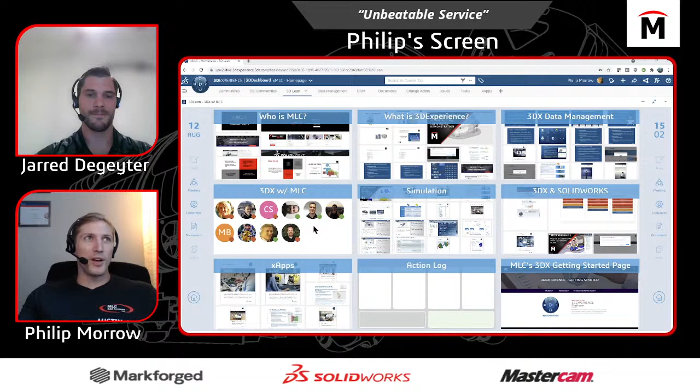But the cool thing about this is multiple people can log in. Like my whole team can log into this, and you could put sticky notes on it, use it like a whiteboard. It's pretty cool if you've got a big touchscreen monitor, but it allows you to have that whiteboard meeting even though you're spread out across the country. But I'm not here to talk about that.

I'm going to talk about data management a little bit, or really just data storage. Probably you think that's a proper name for that, Jared? Yeah, I would say so. I mean, we're not really going to get too deep into the weeds of the data management side of things, but primarily I think trying to highlight the fact that we can work collaboratively with a minimal amount of setup. That's a good point to put out, because everything I'm doing here, I haven't done any setup at all. Everything I want to show is just what you get out of the box. There's a lot of things you can tweak, but you're right, minimal setup here.

And I'm calling this data storage and not data management, because this first tool I want to show you is more like using Dropbox or OneDrive. It's just a place to put files, but you don't have to think about any of this revision control, PLM, lifecycle stuff. And this is called 3D Drive.

Another cool thing about 3D Drive, besides it being as easy to use as OneDrive or Dropbox or anything like that, is that anybody who logs into 3D Experience will have access to a 3D Drive. So you're going to have other people on the team who aren't SOLIDWORKS users and aren't connected to SOLIDWORKS, but you want to invite them to design review meetings.

You want to collaborate with them in some way. You want people to be able to pull a bill of material. Whatever reason they're working with you, they also get a 3D Drive.

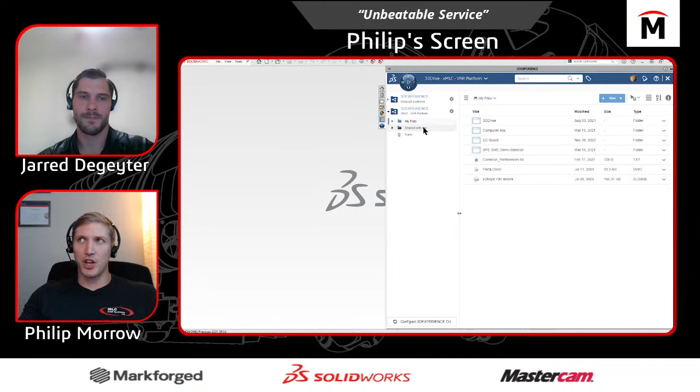So I can access all of those same apps I was just accessing through my web browser inside of SOLIDWORKS. I can hit 3D Drive from here, and then bang, I've got kind of my 2 drives here. I've got my MLC one and the other one. I can see all my files, the ones shared with me. Now I've actually got more control inside of SOLIDWORKS and inside of the web interface than I do in Windows Explorer, because here I've got the trash, I've got shared with me, I've got the history and file information.

So you do get kind of more robust functions if you're doing it inside of SOLIDWORKS or inside of the platform. But I want to move some files that I've got in there, just Windows Explorer style. So if I go down to my desktop, I've got a folder right over here called Gripe Grinder, for grinding all my gripes. And inside of it, I've got a simple assembly for doing my gripe grinding. It's got this many files in it, not a huge number of files. And what I'm going to do is just a little copy.

I just Control-C that to copy and paste right inside of my 3D Drive folder in Windows Explorer, which is not unlike what you'd see happening for Dropbox or OneDrive or anything like that. And you get a symbol on here as well, the refresh symbol, just like you would in OneDrive, for this thing getting picked up and synced up to the cloud. So just give it a second to go up there, and then I'll have it on the other side. I got a green check on it there. That's all it took. Very complicated, right?

Jared, I think even you could master this, getting a file inside of here. That's pivotal technology, I tell you. Pivotal. Actually, I got the folder in here.

I got all the files inside of here as well, all the SOLIDWORKS files. So they're all over on that side. And then I could go check them out on some different spots. Tell you what, I'm going to jump back to the web interface. I work here a bunch, and you can actually see the folder popped up here immediately.

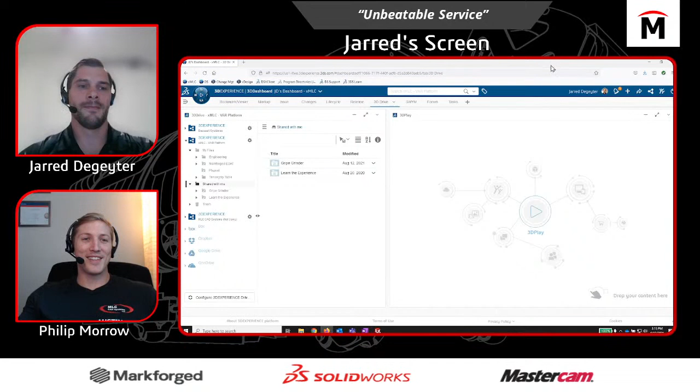I saw a cool question in the chat, which is live: what happens when multiple people try to open the same shared file? Well, right now, that was a good question, Michael Ennis. Right now, same problems as always, because we're kind of on that level 0 file storage. One person's going to have write access, one's going to have read. It wouldn't be good, but we will get to the solution to that problem. So that's a good question, stay tuned, keep that pinned.

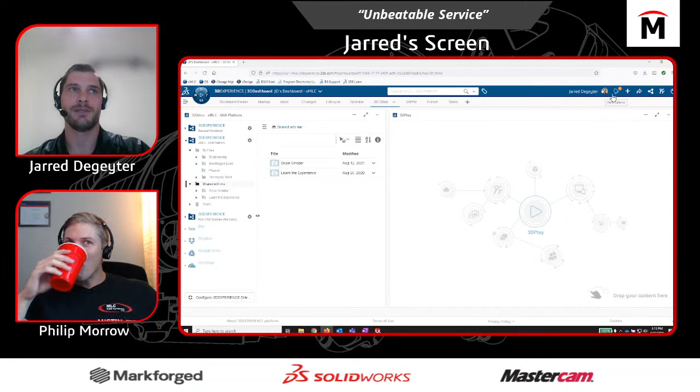All right, guys, so if my feed is coming through, this is going to look really similar. I'm just sitting here in a web browser. And I've got this notification that just came through because Philip just pushed this file set over to me. He said, okay, Philip shared a gripe grinder with me. He said, dude, check out this assembly for grinding gripes. I've got plenty of gripes, I'm sure everybody can relate, so I'm definitely going to go ahead and take a look at that.

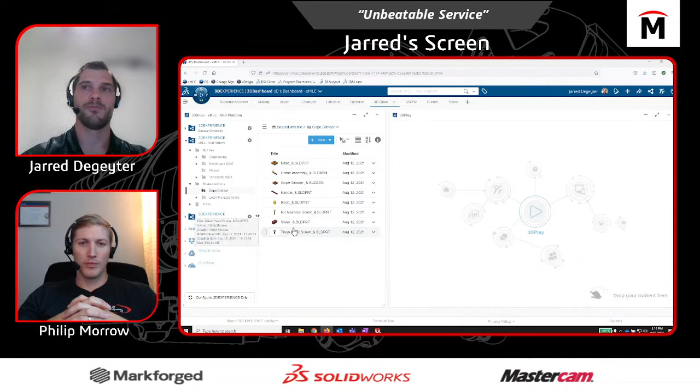I'm just going to get into my 3D Drive. This is the web interface. One of the really cool things about the platform is this built-in preview device we have. 3D Play is basically a previewer. I'm going to find our gripe grinder assembly and drag and drop it into this 3D Play application.

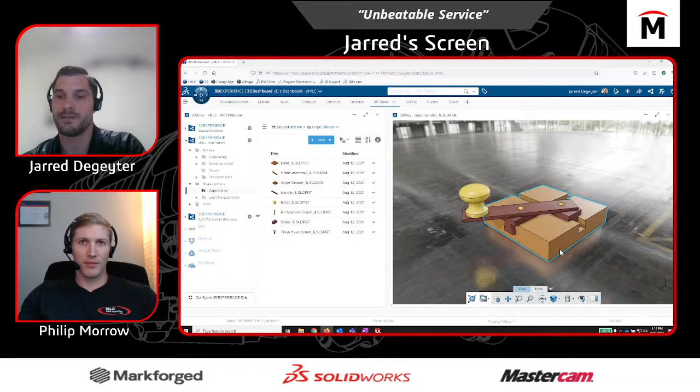So you've got kind of the same layout as me, but you just decided to drag 3D Play and sit it next to your 3D Drive. Yep, super customizable. Every user has the ability to customize their interface to suit them best. On the flip side, as an administrator, you can also create a controlled dashboard that you can push out to your users. Really cool, flexible stuff here.

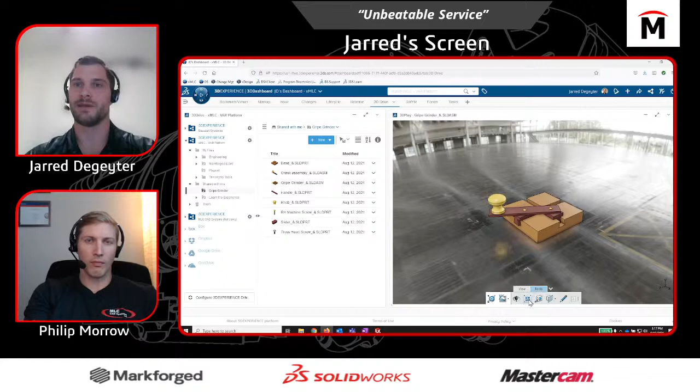This allows me to basically zoom in, zoom out, check out this assembly we're working with right here. You can also do stuff like explode it, so you can see how all the parts fit together. And this is accessible from any device that's connected to the internet.

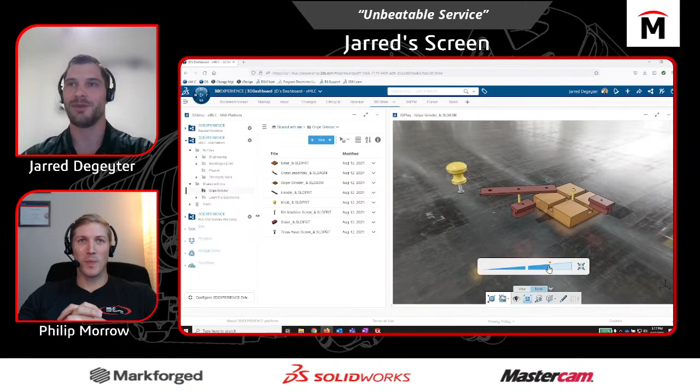That's not an exploded view that's made in SolidWorks, is it? Right, this is doing the exploded view by itself, 100%, so you don't have to waste time doing it. It's kind of funky, I guess, the way it's blowing it out, but it gets the point across, and you didn't have to do any work for it.

That's pretty cool, I think you take what you can get. I don't want to hear your gripes, that's why we have this gripe grinder here. I think you can do that in eDrawings too, man, it's like an Easter egg in eDrawings. If you hit E, I think it might be X... I think it's E though. It'll do something similar, there's some type of functionality in there, right?

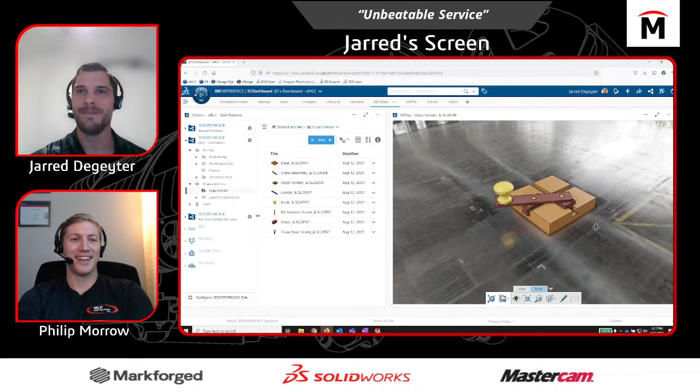This lets me preview it, and I just think it's really cool. If you have somebody on the shop floor and they need to see how something fits together, maybe they could access it from an iPad or their iPhone. Yeah, that's a good point. Because this is definitely 100% cloud, man, no local installs or anything.

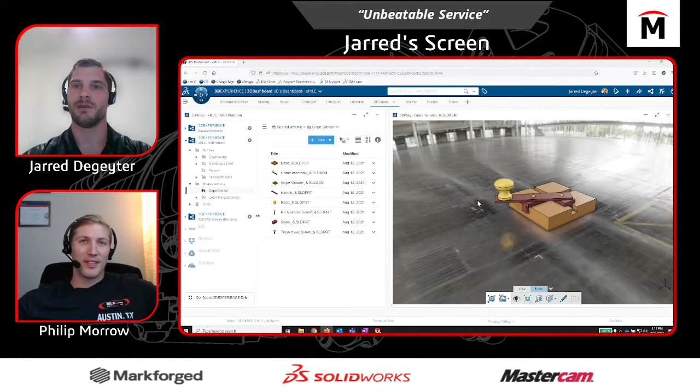So that's what I'm looking at doing. I'm going to go ahead and minimize my web browser and get SolidWorks open. From within SolidWorks, this is the little task pane icon that Philip was showing you guys earlier. I'm going to once again access that 3D Drive, and we're about to move into the next stage of the data management side of things.

That's a good stage to get to because it answers Michael Lannis's question in the chat. Right now people are solving their work-from-home problems the way we're doing it so far: using 3D Drive, OneDrive, or whatever, sticking it in there. What happens when two people try to open the same file? Or what happens when one person works on an assembly? They get write access to all the files inside that assembly too, so another user can't even work with any of those files, and it bogs stuff down. Yep, I'm sure a lot of people here could relate to that.

So what we're going to do is move into that next phase of data management in the platform. I'm just going to drag this gripe grinder assembly out into my SolidWorks. It hadn't been synced to my local hard drive, so once again this isn't a canned demo -- we're getting it live. I'm just going to go ahead and download this.

So I'll save this to my desktop maybe. You can leave it there too, refresh. Do you have 3D Drive installed locally, like do you do the Windows install? Yeah, I sure do. Maybe it'd be easier to open it through there. Yeah, maybe it's worth checking, that thing seems to sync and update live for me.

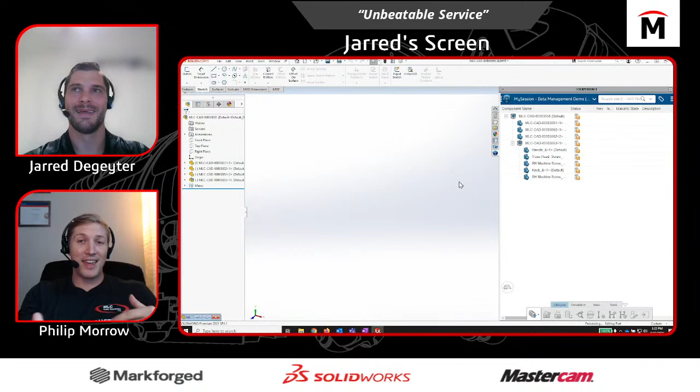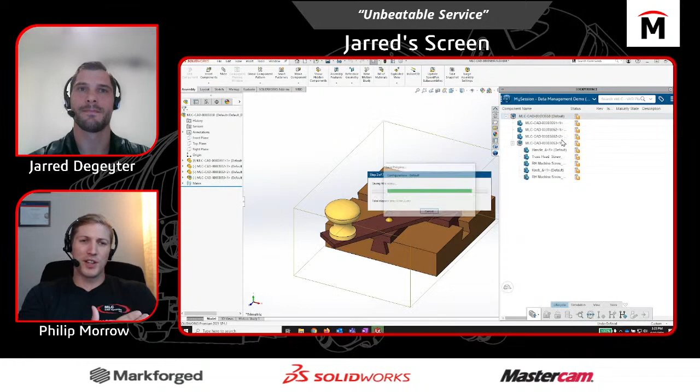What I've done for us is I've enforced that every time you save, it gets copied to your local cache spot and gets renamed in a convention that we want files named, like uniquely named. And I do that to prevent file duplicates, because SolidWorks looks for files by their name. Even if you think you saved them in two different servers or whatever, it looks first by name. If you've got two parts named Grinder, it's going to find the wrong one at some point. So I just make sure it always copies to my local cache folder and gives it a unique file name. Bam, I never have to worry about file reference issues.

Though you have to deal with the file name that I want, which is like MLC-CAD and a bunch of numbers. And that local cache by default is on your C drive, just like a C 3D Experience, you can actually work directly inside of it if you want to, but you don't have to. And in fact, I really don't. Most people using 3D Experience SolidWorks, like SolidWorks Connected, won't ever even look inside of that folder.

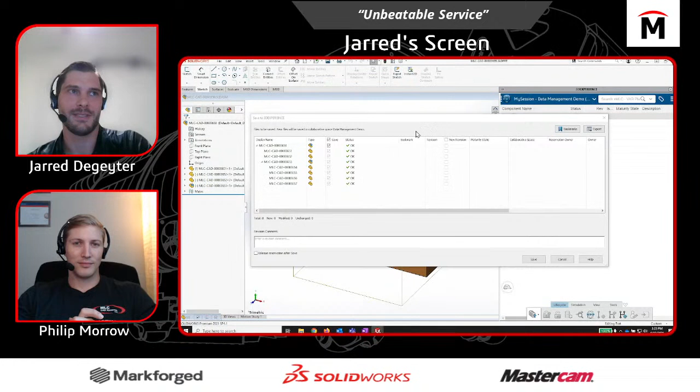So Phil, this assembly that you sent over here, does it have like 500 different configurations or something? It does have a lot of configurations in a couple of the components, now that you mention it. Yeah, so that's what's going on right here, it's calculating all these configurations. That's why my screen was acting a little spastic there.

Why does it matter basically if a file has a lot of configurations? What's different? Great question.

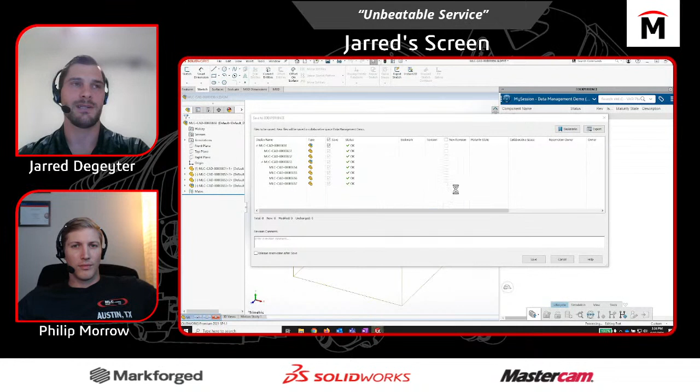Whenever these files get pushed to the platform, what we know as a SolidWorks part actually gets saved out as a CAD family. And then any of the configurations within that CAD family are going to be saved out as what's called a physical product. So it kind of gets its own little placeholder once it gets saved up to the cloud. That's why this has taken a little bit of time, just due to the fact that there's a large number of configurations in the background.

No worries, you can let it process and calculate through all that. It's interesting to point out, I definitely gave you one with a super large amount of configurations in some of the hardware.

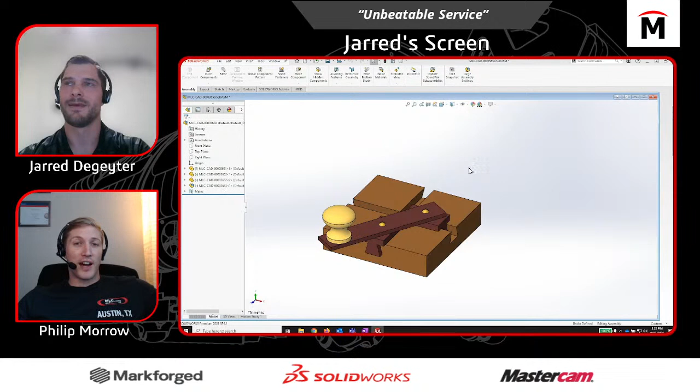But any SolidWorks file on its own is really constructed of three parts. It's got the parasolid data, which just describes the body - you could just save that to like steps and that's what you get. Then it's got the parametric data, which is really the feature intelligence and all the intelligence we build in. Then it's got the graphics display data.

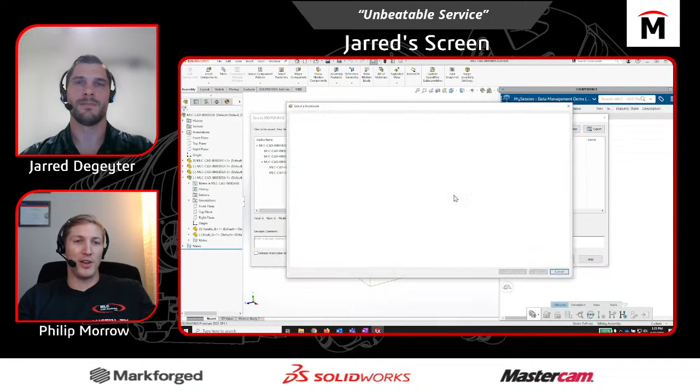And 3D Experience is one big database, so by breaking it into its constituent parts, you can do different stuff. Like when you pull something into 3D Play, you're just accessing that display data part of it, which is why you can be super fast with a giant assembly and spin it around and use it there. So it gives you the ability to do a lot of different stuff.

But it's true, when you get up there, you're actually going to see a new file for every configuration. I usually clean those out - there's a quick way to clean them out, and I'll just use one. But yeah, that's what's going on.

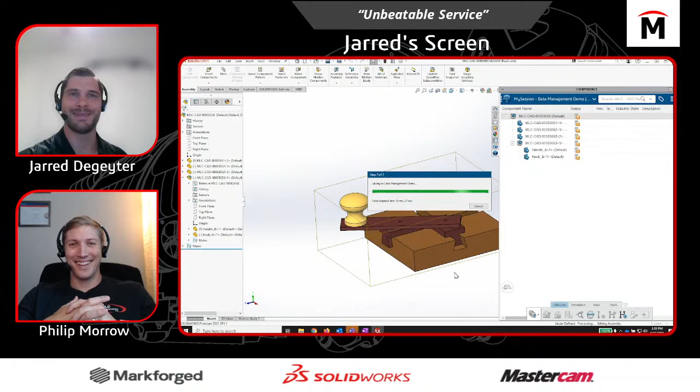So I deleted those because they had like a million different configurations, and instead of boring everybody with that, I just went ahead and took them out. But notice how this save went a lot smoother this time.

So all these files, if you look in the status column right here, they have that green check mark next to them. That's implying that the file has not been modified at all since it's been last saved to the 3D Experience platform, and it's also been pushed up to the cloud.

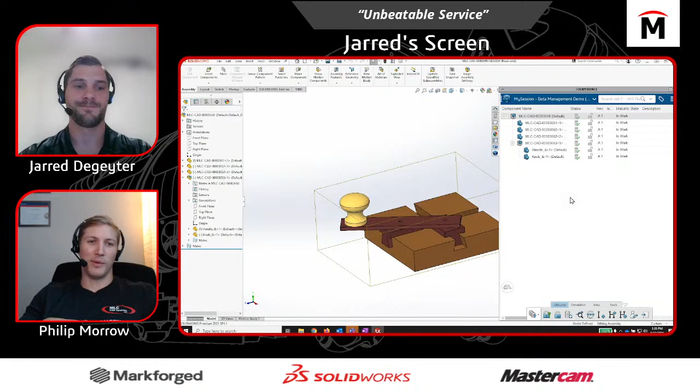So now those are cloud files inside of what we would call a collaborative space, which allows us to manage things like the maturity state of those particular files and manage things like who has the reservation for that file, which is similar to a check-in or check-out if you're coming from the PDM side of things. That will prevent problems with two people trying to work on the same file at the same time - basically, can't happen.

That's correct. I want to show one other thing here before we jump off. I'm just going to get into my bookmark editor. Since everything's housed inside of a big database on the platform, these bookmarks are really useful in navigating and finding your files whenever you want to access them.

So you can think of this as kind of like a Windows folder structure. If any of you guys were paying really close attention whenever I made this save, you would have noticed that I saved all of these to a particular bookmark. So now if I click on this bookmark, essentially a folder structure, I can see all of the files that were saved up here.

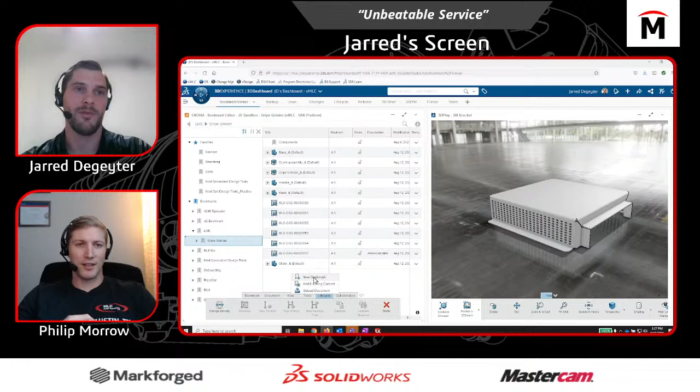Okay, so these are your project folders, and it looks like you made this folder ahead of time. Yep, I just had this created here. Pretty easy to make another folder structure - it's just a right click away, and then you bookmark. Nothing really too crazy there.

We haven't done this together yet, Jared, but you can actually templatize these bookmark structures. So if you have a project folder structure that you want to be consistent with company-wise, you can always use that template.

So yeah, I see. Yep, we do that a lot on the PDM side.

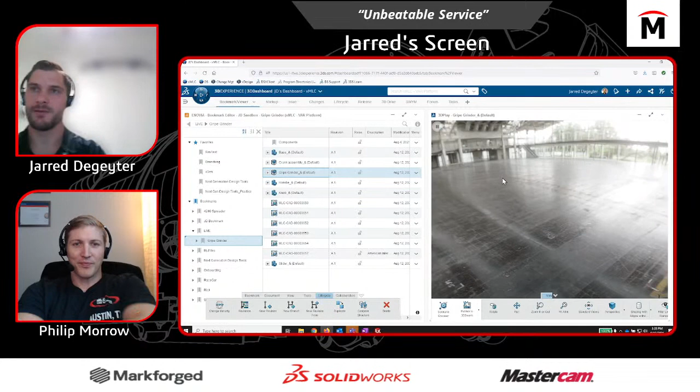Okay, cool. So I see three different, I want to call them file types, but I think the correct name is object, because I see you've got some physical products, which are what configurations come over as, and I know that because they look like SOLIDWORKS symbols for parts and assemblies. But then there's a new symbol there for your things. Yep, that's those CAD family files we were talking about. Gotcha. So those CAD families, that's like the file. The configuration though is also kind of like the file. Which one do you like working with? I guess it's a file, or you can open either one.

Yeah, so I like working with the physical products. So that's generally what you're going to actually be making changes to. You can think of the CAD family as kind of like a big container that just houses those physical products.

Okay, so I'm actually going to go ahead and remove these just from the bookmark. I'm not going to delete them, just clean up my working area here. Yeah, that makes sense. And now this is what I've got. This is just as easy to drag and drop these physical product files around as if you were working inside a Windows folder structure. So if I wanted to clean up the components and move those around, we could do that.

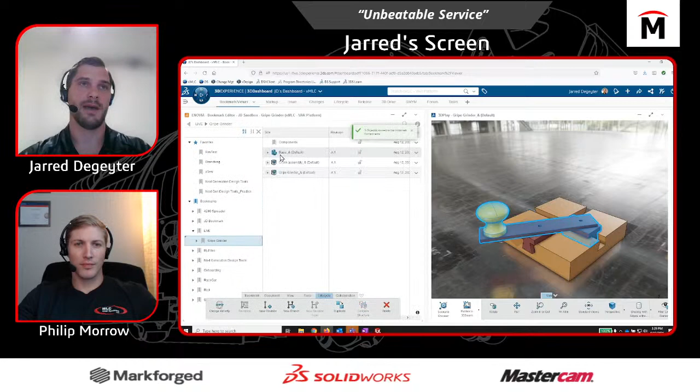So I'll house all the components inside another bookmark folder by doing this. And then I'll just leave that main assembly sitting right here at the root level of that project folder, trying to be nice, looking out for the people that are going to come behind me.

Unlike Philip, who decides to send over like 100 configurations whenever we do an upload. So, so this is looking good.

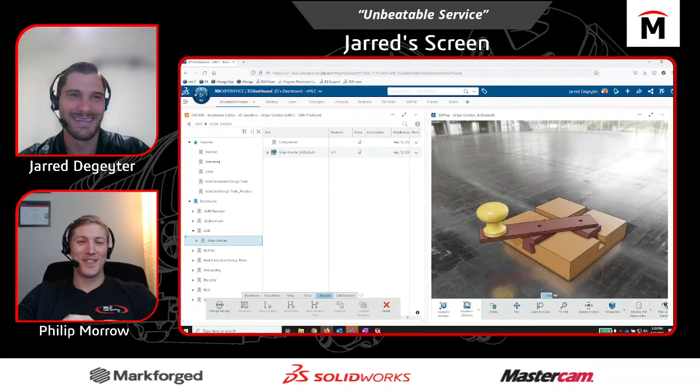Man, so I guess what we really need to do next is just kind of demonstrate how those reservations work. Does that sound like a plan, Phil? Yeah, make some changes to it.

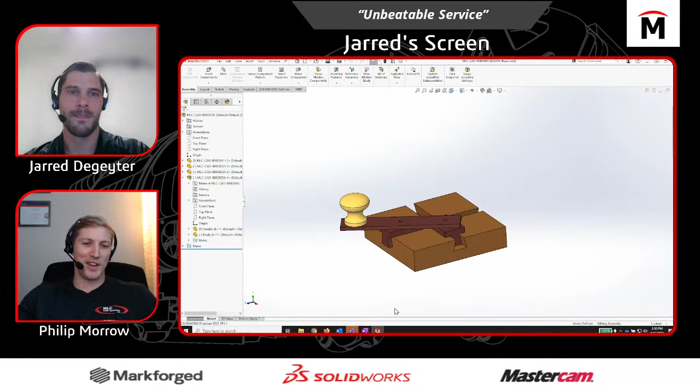Tell you what, I'm going to flip back to my screen and see what I see over here, because we're supposed to be working together. I put them in Drive, you took them out of Drive and said, hey, I want to use some data management, and you put them into a space.

So I'm switching back over to my screen now. And real quick, I'm just going to jump back to my 3D Lean board, because really here we've moved from what I was calling level 0, which was data storage, into the first level of data management, which is putting your files in a 3D space.

I think of a 3D space, if you're a traditional SOLIDWORKS PDM user, like a vault. It's just kind of this big database space, and you can send all your SOLIDWORKS files there. They come through SOLIDWORKS, they get translated, as you saw, into these cool ways, so you can deal with just the 3D shape or the physical product, and you can leverage them in different ways across the platform.

But it also means now they're in a data management system, so it's much easier to share with people. We're not going to have trouble working on the same file at the same time. If somebody opens up a top level assembly, it doesn't mean I can't work on a sub assembly or a part. And sky's the limit from there, because this is just level 1.

So what I'm going to do is jump back over to my data management tab, and I'm just going to minimize the 3D drive that I had over there and maximize, let's say, my bookmark editor. I've got a whole bunch of bookmarks I've been working in, but I see the one here called Gripe Grinder. Look at that. There's the Gripe Grinder assembly and the components subfolder.

I could use it in 3D drive. After I open it too, my thumbnail, since I've got mine set for big thumbnails, will actually show the shape of the Gripe Grinder as well. And that kind of stuff in the Bookmark app, again, is in the preferences.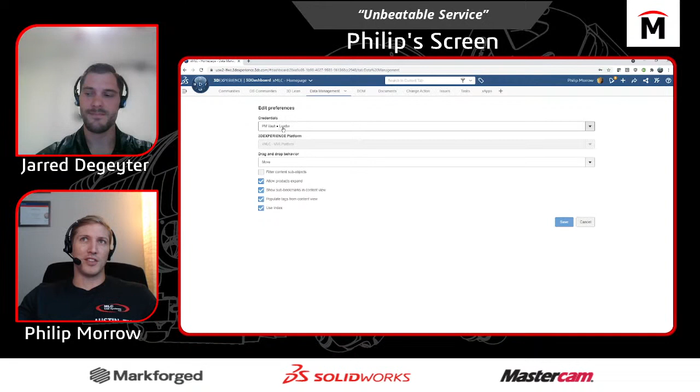I mentioned to take a look at it for 3D drive, but when you start working in a space, it's much more important to look inside the preferences, especially because you might have multiple spaces. Whenever you create anything, a bookmark, a file, an X Drive file, whatever, you can put it into the correct space. So you can see which space you're in, and then some other cool stuff like allow products to expand is checked on mine, and I'm showing the thumbnails.

I've also chosen what columns I want here at the top. The product expansion allows me to click on one of these and see a sub-assembly and more components inside of that assembly. So make sure you check out the preferences for all these apps. Down at the bottom, they've always got a toolbar, ribbon style.

That's where I customized columns for this kind of stuff. And of course, I can drag and drop right from here into SolidWorks. Or let's see if I pull my SolidWorks up again. Just like before, when I got in 3D Drive, I can get into my bookmarks from right inside of SOLIDWORKS as well.

Everything is connected. That's one of the big takeaways that I got whenever I first started working here. Everything is connected in a huge way.

That is very true. And one of the things that I probably should mention too is that I've got the ability to set everything to a specific space. Even inside of here when I'm working, I want to make sure I'm saving into the correct space. Now, a lot of people just use one common space, but think of it like PDM. Some PDM users have multiple vaults for different teams, and that's kind of like you can switch which vault you're on. But let's take a look in that subfolder I just had open live.

I've got the Gripe Grinder subfolder. I've got Gripe Grinder assembly inside of there. I'm just going to drag it from there into SolidWorks. And let's see what happens here. It looks like it's preparing, it's fetching data.

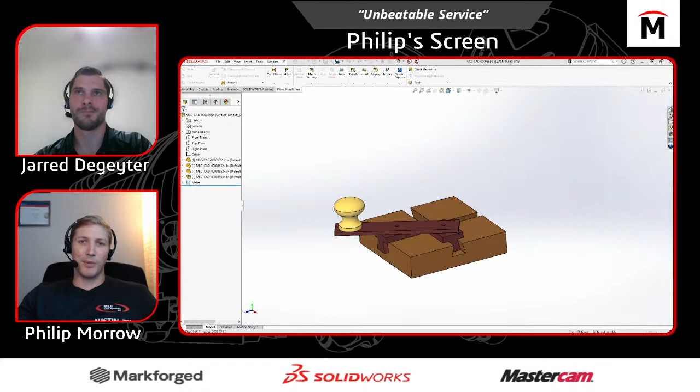Now this stuff wasn't on my computer in that space or with these file names. I've got title here, which is really a custom property that was mapped in from SolidWorks. So you're seeing the name Gripe Grinder, but really my file name is mlccad dash, a bunch of numbers. But inside of this assembly, if I look at its properties, it had a configuration property called title, and this thing picked that up and wrote that over there for me. So just kind of, we're talking data management stuff now. It's like reading attributes and pushing them around. So it pulled title into there.

It also brought this in as Rev A.1. It's the very first one in existence. I don't think we should talk much about life cycles and workflows, but Rev A, it wrote that information back to the part when you saved it, so it knows that it's A.1.

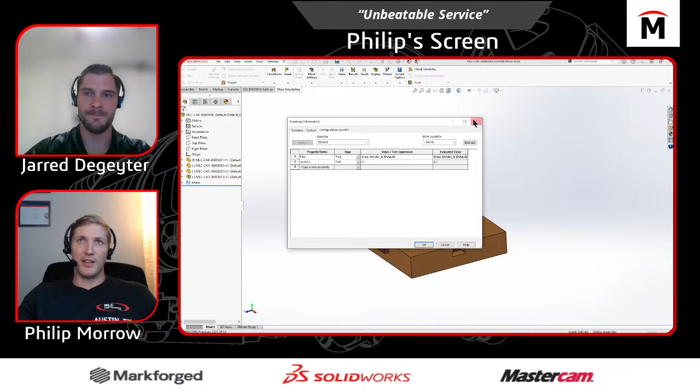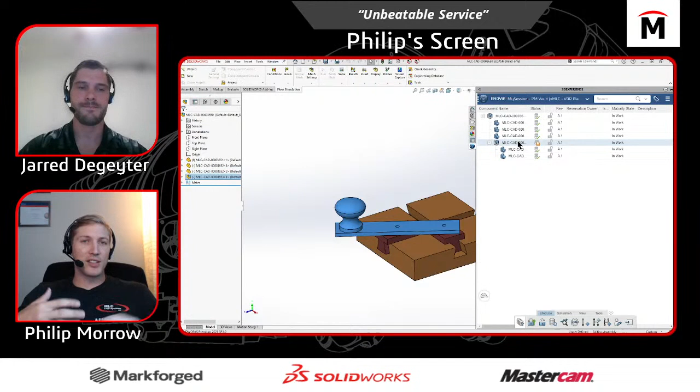So I've got this assembly over on my side. Maybe I want there to be a couple of these in here. I'm going to go ahead and close my bookmarks editor and get back to the My Session app that Jared was showing you earlier, and it's got some different things to show me. I've actually moved one of these components already, just moved its position. And so, since these have freedom to move, check it out, they move around like this.

Oh man, you took the hardware off and it can move all over now. Dude, you broke some of my mates. There's definitely work to do in this subassembly. And of course, whatever I do in that subassembly is going to affect the top one. Boy, where do... Well, you've got all the data over there. I think you had like 9 out of 10 gigs, so you should probably knock that one out.

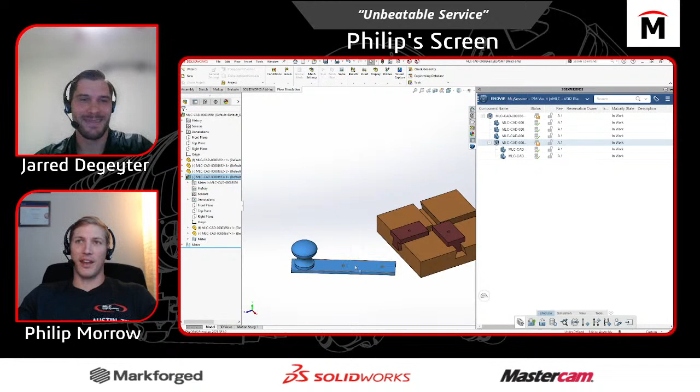Which one of your mistakes do I want to fix first? I think I'm going to start at the top level, and I'm going to try to repair top level assembly mates. So in order to do this, I'm just going to right click on the top level over here and hit reserve.

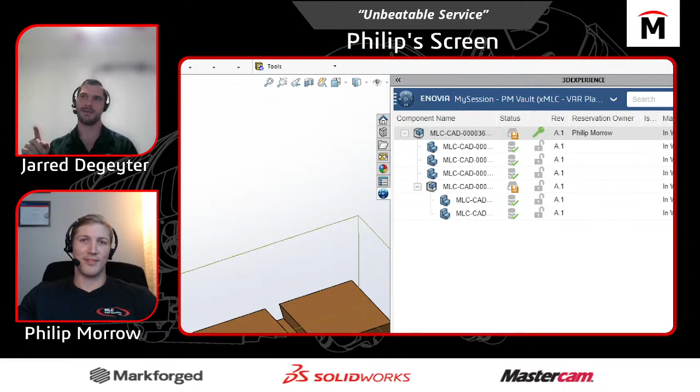Reserve, analogous to checkout in PDM, has given me a little green key over here on the side. And hold up, I'm instantaneously seeing a red lock over here for that file. Let's look at your screen. All right, we're taking a look at Jared's screen now. I see the red lock you're talking about. So you saw that, I'm instantly another user. Yeah, that came over pretty much as soon as you hit it. Did you hit a refresh button or anything? Yeah, I refreshed it.

I can refresh on demand by clicking right here and hitting this little refresh button. If I hover over that, it gives me a tooltip that says reserved by Philip Oh, Morrow, so I know exactly who to bug if I need to work on this.

That's super cool. And some of those columns to the right are customizable as well. They could say my name over there, or you can have reserved by who it is. That's pretty cool.

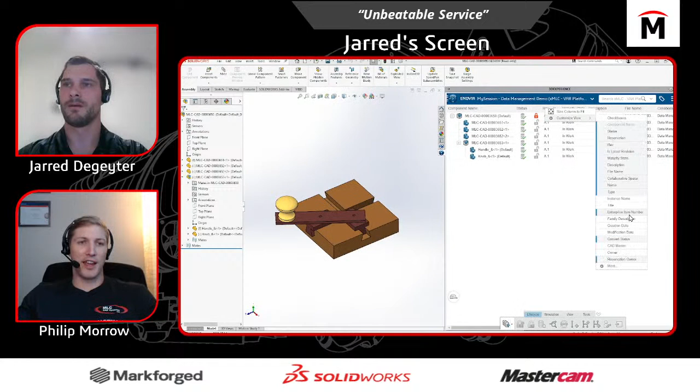So it's kind of like a rebuild in terms of refreshes. If you do a certain operation, it's going to rebuild, like if you close and open a sketch in SolidWorks, edit and close out of a sketch, it's going to rebuild your part. Over here, it's going to update this information sometimes, or you can manually hit refresh and it'll update things there.

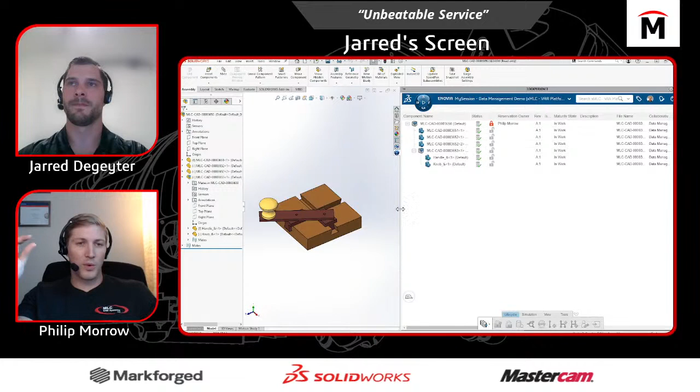I do know if you had tried to reserve that before any refresh happened, it had the red lock — it didn't have the red lock there yet because I just reserved it, and you hadn't really done anything in SolidWorks. If you tried to reserve it or do something with it, it will prevent that. Those are kind of actions that would make it go look.

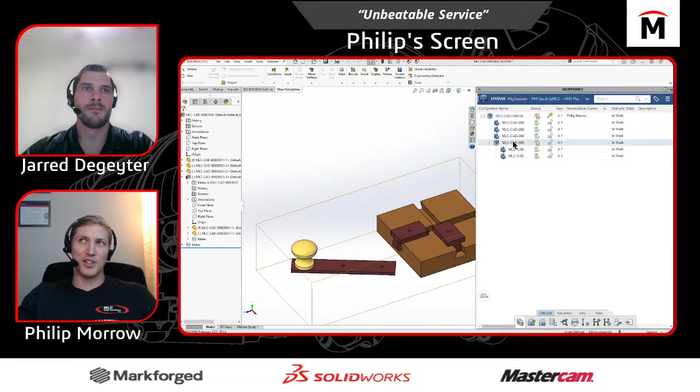All right, I'm gonna switch back over to my screen. Okay, here I am back at my screen. I've got one subassembly that I didn't reserve, but I've made some changes to it just because I'm basically changing its position, moving it around. That's the arm, but I'm not going to do anything with the arm.

What I want to do at the top level is see, there's a couple of concentric mates that were kind of blown away before. I'm going to try to rebuild some of those and see if we get the motion that I'm looking for.

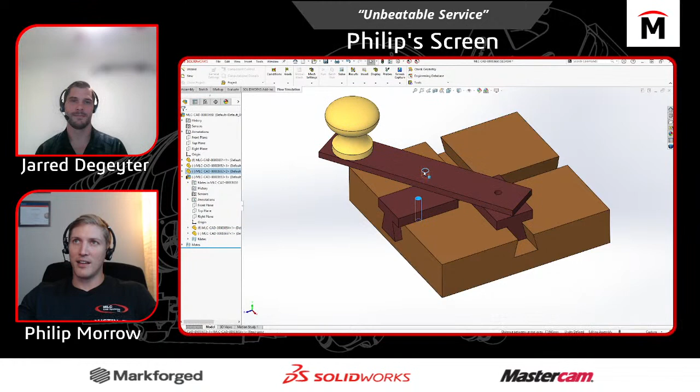So I got one of them in there. Yeah, that looks okay. Let's see, I like to choose faces when I'm doing mates instead of edges — you know what I mean? They give a little more information.

And then, oh, look at that. Now, you did delete my awesome hardware, but that looks pretty darn slick — that thing moving around. Well, so you got the motion working and everything. Yeah, that's a cool little assembly.

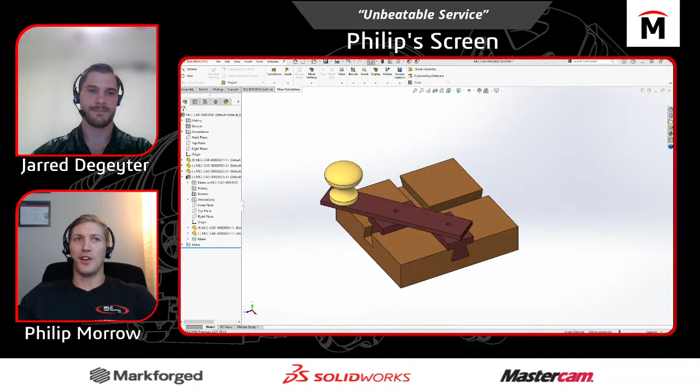Okay, right on. I've added some top level assembly mates. That's really what I'm worried about. It's got my name as the reservation owner.

I guess I should save it up so that you can get this type of stuff. That sounds like a plan, makes sense. I'm gonna right click and hit save. There's also these buttons down at the bottom, like save is down here too — I've just been a SolidWorks user for so long that I'm trained to right click everything. Yeah, I'm definitely more of a right click kind of guy as well.

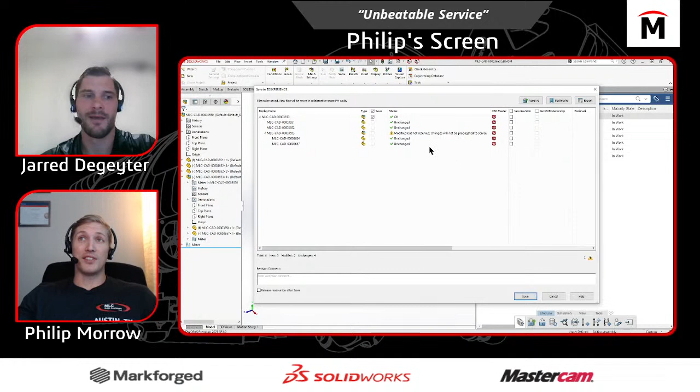I get a lot of info in this save dialog too. Like I'm just saving the top level assembly, but it shows, hey, you made some changes to the sub assembly, but you didn't reserve it, so you can't — maybe somebody else had reserved it in the meantime. So it's warning me about all that kind of stuff.

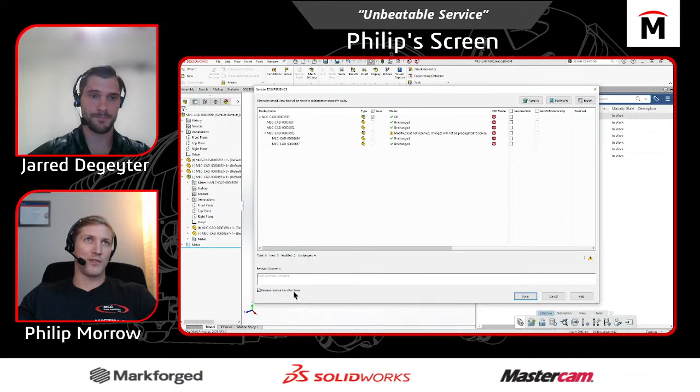Now nobody else had this reserved, so I actually have a reserve button here and I could just click it. But I'm not worried about that sub assembly — I actually want to lose those changes, that's totally fine with me. And I could enter a comment. I'm gonna save it and then release the reservation after the save as well. So all those things were in that save dialog.

Like if I forgot to reserve something, or if I just want to be done with it and unreserve it at the same time, bang — so I saved it, I don't have any more key symbols up here, thing looks pretty good. What does that look like for you, Jared? How do you get that stuff?

I'm going to switch back over to your screen now. Yeah, for sure. So let's see.

Right now I still see the red lock, but I'm going to go ahead and do a quick refresh just to see what that looks like in SolidWorks, because you weren't opening any files. There we go. I'm just sitting here - I didn't even manipulate anything whenever we turned it back over to you.

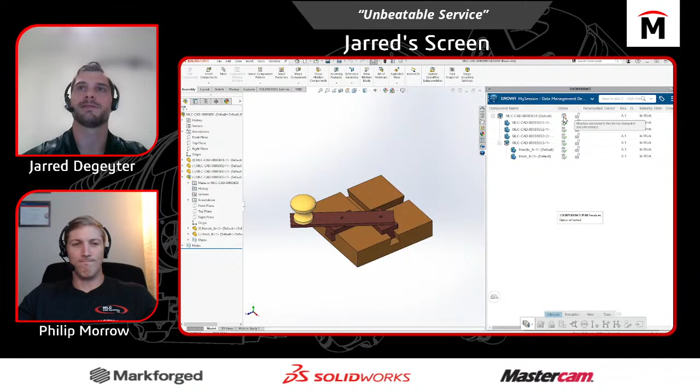So I see that reservation went away, meaning the file's no longer reserved. I also get this symbol, and it tells me the structure associated to this file has changed inside of 3D Experience. So what that allows me to do is right-click that, and I can select Reload from Server - basically get the latest version of this particular file.

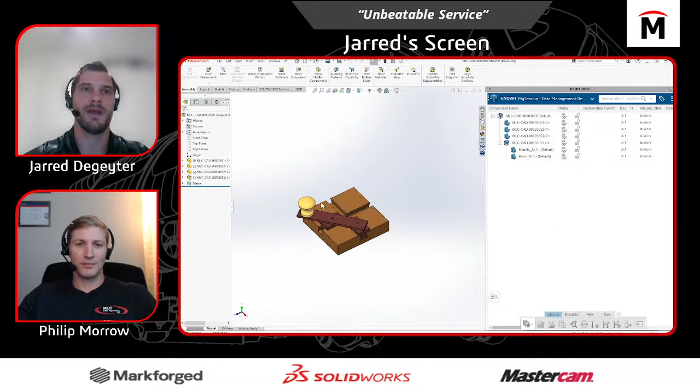Let's see what this gives me - so it's like a get latest. Yeah, so we're reloading. Now I get the green check over here, and I bet if I try to move this thing around... yeah, it works now. So those mate updates that you just created over there are working pretty nicely for me now.

Sick. Of course, since I moved all this around, it's going to let me know that this particular save is going to mark it as being dirty - kind of like what it did to my right sub-assembly earlier.

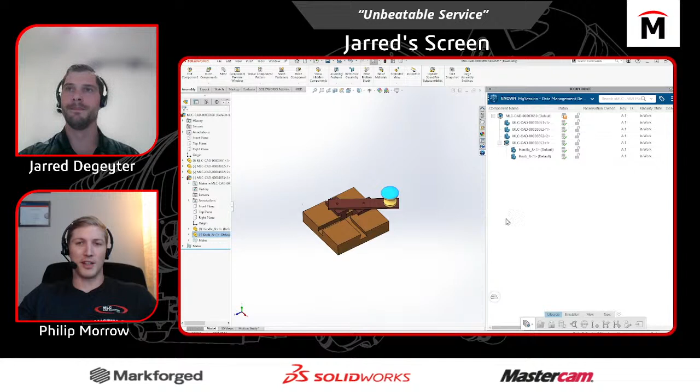So why don't you reserve that top level assembly? I want to make a change to a sub-component real quick - since we don't have hardware in there, I'm going to make it look like it's supposed to be. All right, so you've got it reserved - that means I can't work with it, right?

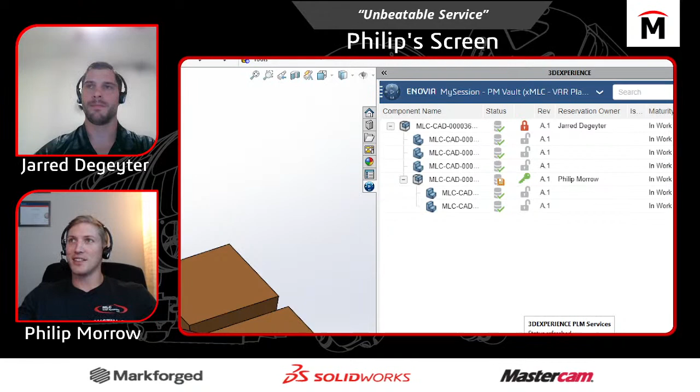I'm going to switch back over to my screen, and I'm going to reserve a subassembly - just the handle part that's there, right-click and reserve that one. There you go, shows reserved by me. Let me refresh my session as well just to show that immediate red lock, and I keep my reservation owner column right over there too. So it's red locked, and that one's by Jared, so I can't work on that - but I can work on this subassembly at the same time.

And the sub-assembly is what I wanted - honestly, it was this component. This gives you the same cross-highlighting as a SolidWorks tree, so I'm going to reserve that one as well. This is probably the only thing I really wanted to change, so I'm going to open this component up.

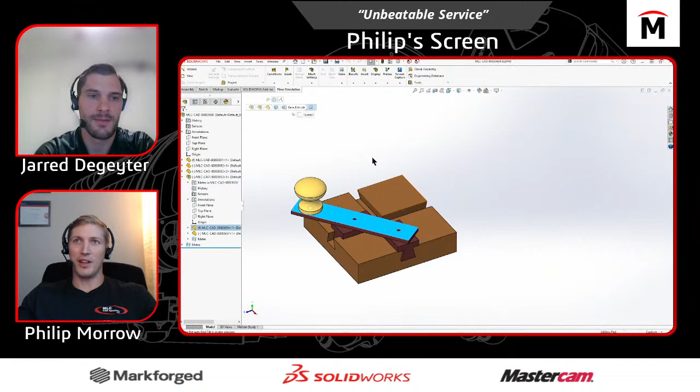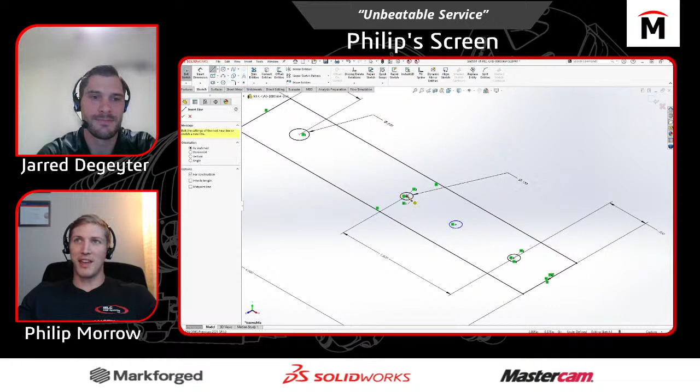Wow, it's all done in one sketch. I'm going to get into the sketch, and if I get rid of these holes, which is what I wanted to do, I'll end up with a broken mate because I mated concentric to those holes. But what I'm going to do is add another hole, since they were made inside this sketch, and make it equal in radius to these other two, so its size is the same. There's a lot of ways to do this, like a symmetry relationship, but I like to use a couple center lines sometimes, and then use equal relationships on those as well. Notice I just got a fully defined sketch without putting any more numbers into it.

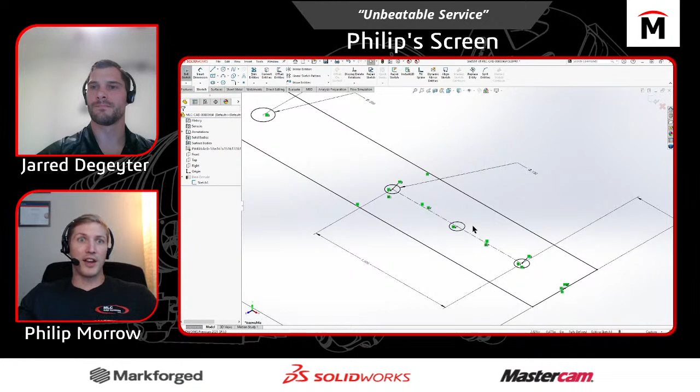Sketching is really the fundamental area of SolidWorks, and everything builds up from there, and that continues as we go into 3D Experience and Cloud Data Management, and as we move to other things that are connected together in 3D Experience as well. So that's one way to do it with just the equals relationships inside there.

So I put a third hole on this guy, and you know what, I don't think we need to make it out of the material that's on there - there's like a DIN material on there. This is my thing, so I'm going to make it out of gold because I can. And then I'm going to hit save, regular old SolidWorks save. I guess I could turn on my real view graphics.

It doesn't look that much like gold.

I have them off, but I'm going to hit save. That save right there was local, just a local save. So I'm going to give you guys just a preview of what I mean.

If I jump over to my C drive, I've got a 3D Experience folder there. I've also got a PDM vault, but a 3D Experience folder, and inside of it, I've got a My Work folder. This is what it looks like if you're an existing SOLIDWORKS user and you've just connected SOLIDWORKS to the cloud like I have here. If you're brand new to SOLIDWORKS, you get 3D Experience SOLIDWORKS - this folder's in a different location, but it still exists. And inside the My Work folder, I've got interesting information as well.

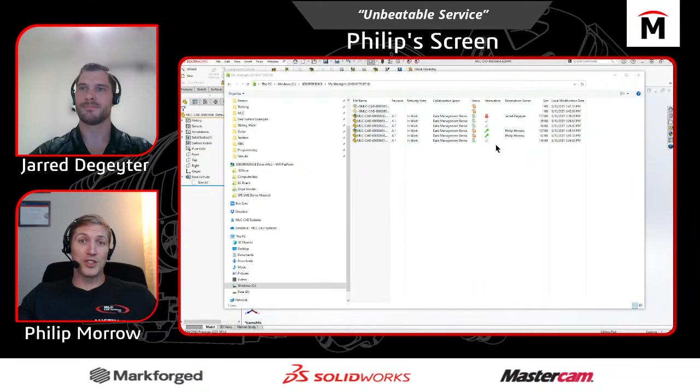You can see the reservations inside of here. Jared's got that one, I've got two reserved. There's been some local changes made on these things that haven't been saved up. About four of them are already saved up to the cloud. So you can work inside of here - there's a lot of right-click stuff you can do, you can organize in here. But I haven't found a need to. It's there - if you like that structure, you can use it.

When I hit save, that's where it's saving to. And that's why I still get the local performance.

I'm not really worried about the internet, although my internet's super fast over here. I don't know how it is in Louisiana, but at least where I am I got gigabit over here. I can upload anything you want. We're running at the same speeds.

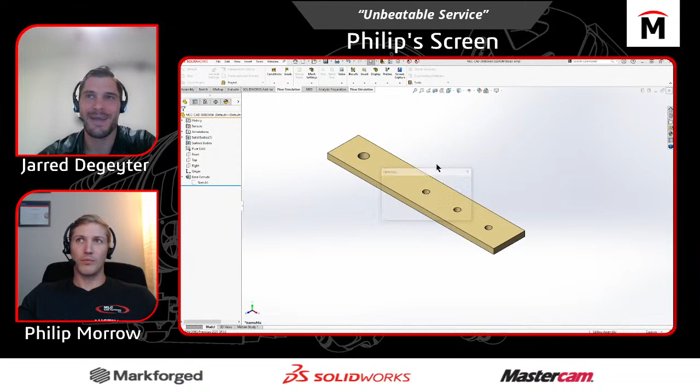One other thing I thought of - since you made that change, you made the change to the subassembly component. Is that correct? I made it to a part inside of a subassembly, that handle part. Do you want me to take a look?

I was just thinking I wanted to showcase one thing that comes up pretty often. So if you make a change to one part, and I'm sure all of you guys are pretty proficient in SolidWorks, oftentimes if that part's used in a couple of different areas, you can run into trouble. Maybe you only intended for that change to happen in one of the assemblies that it's used in. And that's where this relations app comes in.

So you can actually select any of these files here, hit relations, and you can see basically any related object to this particular file. I'm just going to expand this out and take a look at where it's used. You can see that this handle is used in the crank subassembly, which is then used in the gripe grinder assembly. And if this was being used in another assembly, I could see it right here and then make the appropriate change if that was needed.

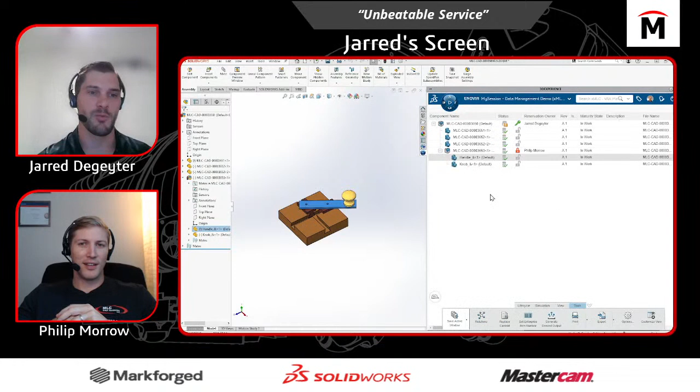I just wanted to showcase that even the bookmark shows up here too. So I just think that's pretty powerful and can save you a lot of trouble from making maybe some inadvertent types of changes. Yeah, that's a really good one, man, because that's your where-used content.

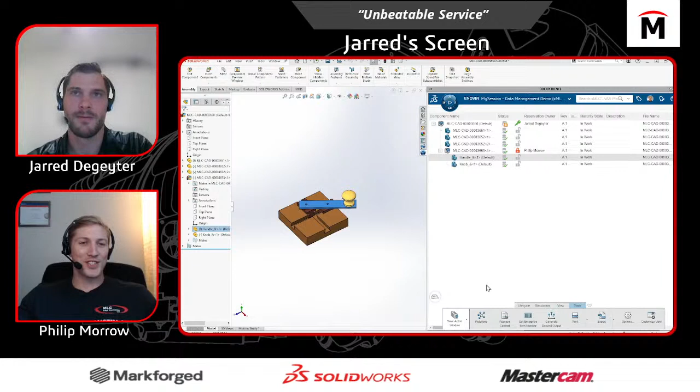You can filter that thing pretty good too. I notice your bookmark is there, and when you start working in 3D Experience, it's like, oh, you can connect all sorts of stuff together. I got simulations and different things and bookmarks - if you have a big assembly, you can see a lot, and you can filter a lot of that stuff out so that you're just looking at the file types and things you want to see.

But yeah, I probably should have checked some where-used info when I go changing parts. All right, so let's see. I'm gonna flip back over to my screen.

Here we go, and I'm just gonna save up this subassembly. I mean, I can't save up - I'll save the subassembly of the part. I can't save up the top level, even though I've made some local changes. I know I'm gonna lose those because you've got it checked out, or I gotta call you and say, hey, wait, I did some work and I forgot to reserve. So you have to police it a little bit, but it tells you all the info. So I'm gonna go ahead and save this guy.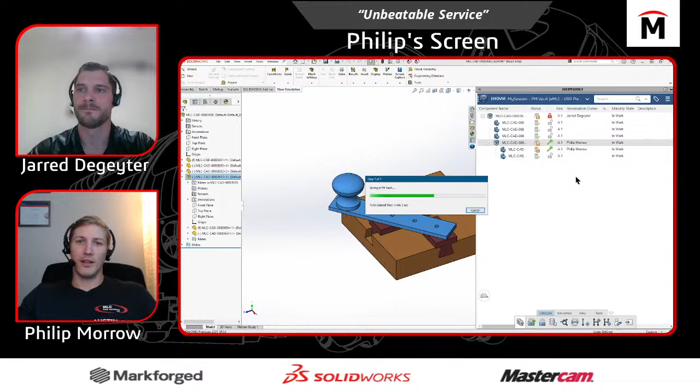Saving into PM Vault, let's see if that's true. I put it in the bookmark - want to make sure I save it in the right spot. Yeah, it saved both of those up for me. I didn't do the save with options that time, so I didn't get that full dialog window showing where it's bookmarked, who reserved it, and stuff. I just hit save and it's kicked it on up.

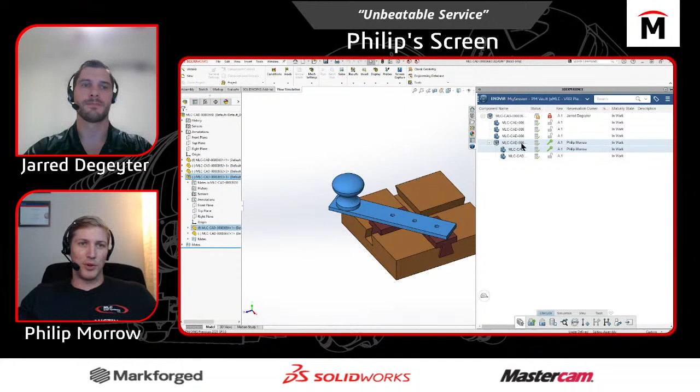But I guess I'll go ahead and unreserve these as well because I'm done working on them. I changed them to gold, and I punched another hole in the middle of it there.

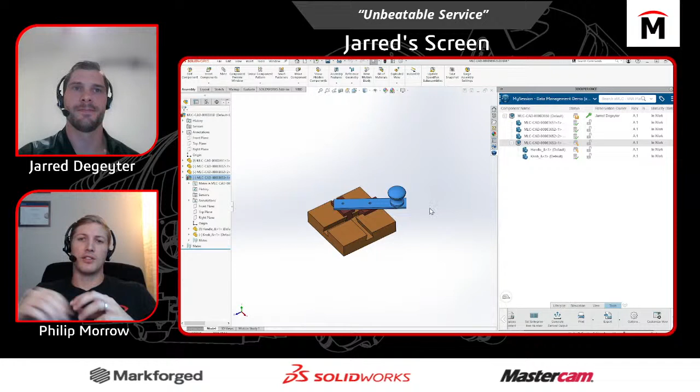I think I'm good. I can see you're still on the top level assembly, so I'm just going to switch over. Now I'm looking at your screen. So once again I get these little marks here just letting me know those aren't the latest. I'm just going to reload from the server, that way I get the updates that you created. Okay sweet, doesn't really take too long - reloading the subassembly. Right on, that's all we had to do.

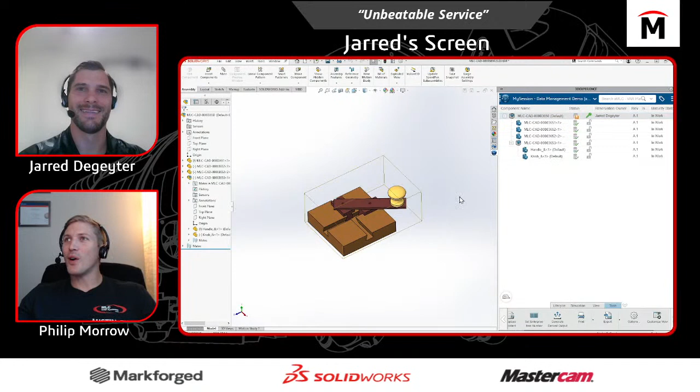Do you have to rebuild? So I saw that, I'll go ahead and rebuild, let's see if we get any changes here. And I'm not even 100% sure what you changed either. I think I put one other - oh, there we go. I just had to reload from server the top level.

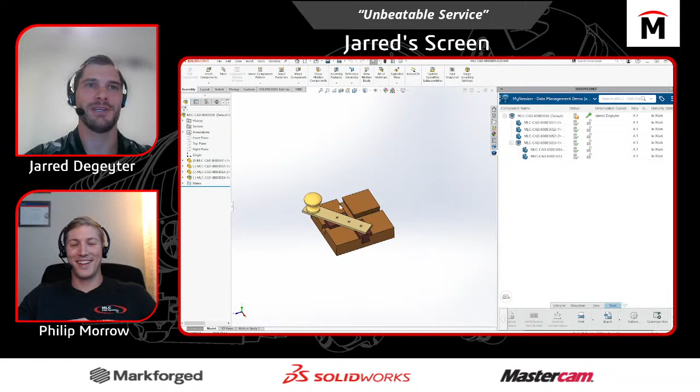Oh I get it - you reloaded the subassembly, but not the part that was inside of the subassembly. So you did kind of a get latest on a certain file, but not the files inside of it. Because I was like, where's my gold? Yeah, it kind of threw me off for a second. I didn't know what changes you had made, but that took care of it for sure.

Man, I'm trying to think of any other functionality we want to show here. Tell you what, I don't want to go too much further.

I'm going to show my screen for a second because I do want to get back over to my 3D Lean board. I'm gonna unreserve that part too, by the way. All right, I'll reserve it - just don't do too much more with it, leave it open. I got something else I want you to do with it before we close up shop.

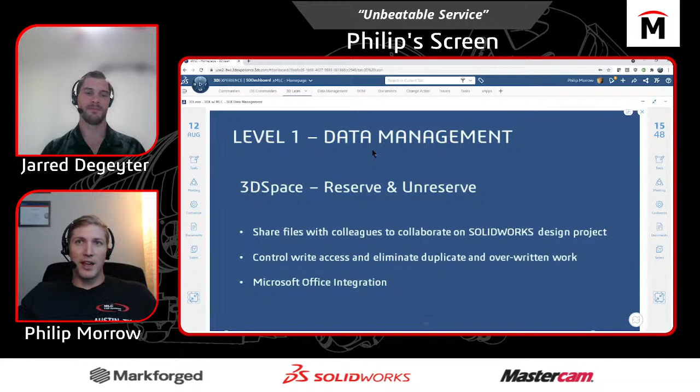Cool, because that was kind of just level one of data management - how two people work on the same file from two different states. It's not that hard, you got to learn about reserve and unreserve, you got to read the symbols. Yeah, you could just use a 3D drive or a Dropbox or something, but then two people can't get in the same assembly and make changes, and you don't really have any history. You just lose a lot of control.

There's a lot more that comes to it from there. We just talked about level one, but all this stuff is going into a life cycle now. I mentioned that it was stamped Rev A by default, and we've actually been working on it in an in-work state. You don't have to know any of this stuff - if you just want to work with two people in two different locations on files and have secure access over them, you don't have to know anything about this kind of life cycle, Rev A, Rev B stuff. But that would be the next place to go.

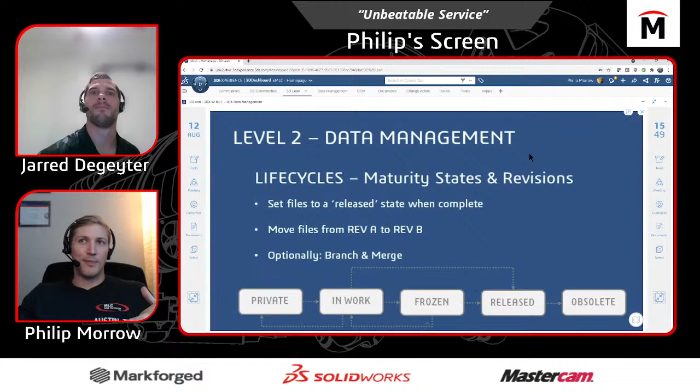I think we should store some of that away because I'm sure we could talk for quite a long time and go into additional levels. But why don't I switch back to your screen and why don't we just put these files in a release state? Going to switch back over to you, and I can see they're in work on the right side of your screen right now. So one other thing I want to point out is that you can limit who has the capabilities to make these maturity state changes, so not just...